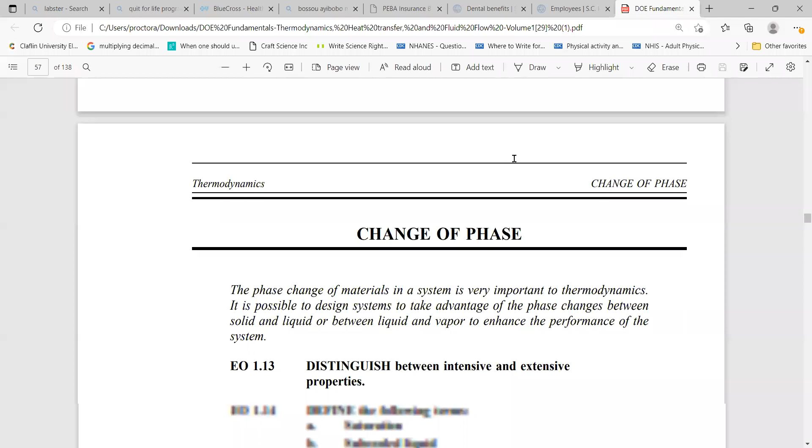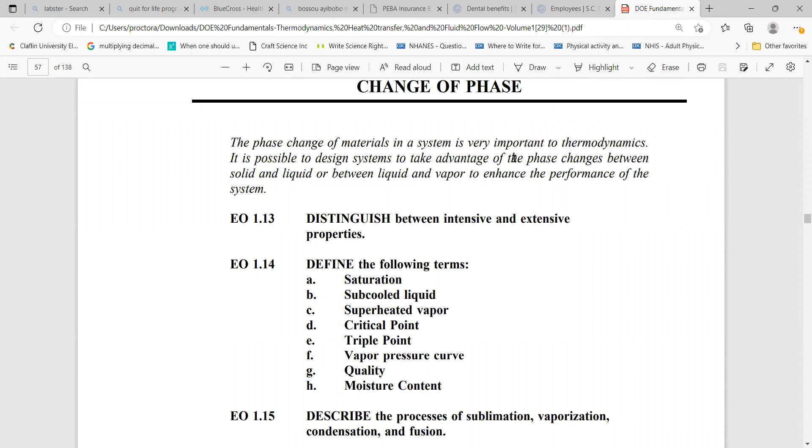Now we're going to talk about change of phase. The phase change of a material in a system is important to the study of thermodynamics. It's essential to understand the difference between solid and liquid, or between liquid and vapor, and how this is used to enhance the performance of a system. So it's important to understand phase.

Now, there are certain gas laws where we think about phase, and there are certain properties of solutions where we like to think about phase. And so, like I said, knowledge comes from the top down, and sometimes the way that we've worked in thermodynamics to understand phase changes has impacted people's daily life.

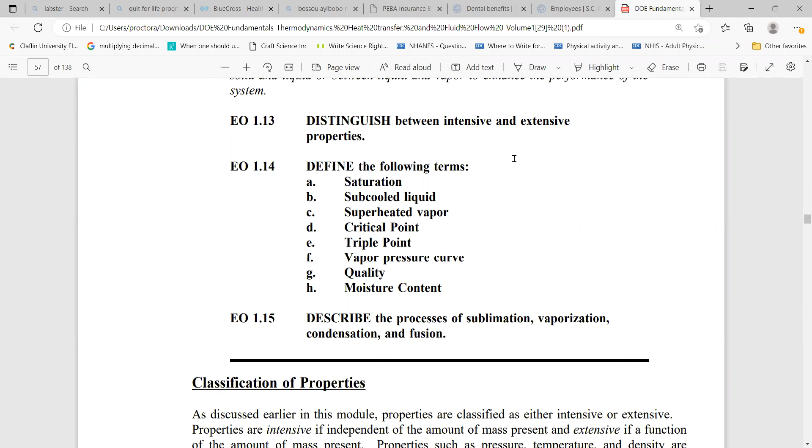So we're going to distinguish between intensive and extensive properties, and then we're going to talk about saturation, subcooled liquids, superheated vapor, critical points on a graph, triple points on a graph, the vapor pressure curve, quality, and moisture content. And then we're going to describe processes: sublimation, vaporization, condensation, and fusion.

These classification of properties, we talked about this earlier, and these properties are classified as either intensive or extensive. Remember intensive properties are independent of mass - temperature, pressure, density, specific volume. Extensive properties are directly related to the amount of mass present. So pressure and density are intensive, while volume and mass are extensive properties.

And these extensive properties may become intensive by dividing the property by the total mass. So they're trying to give you a way mathematically that you can look at this extensive property as an intensive property. Total volume, which is an extensive property, can be changed to a specific volume, which is an intensive property, by dividing it by the mass of the system.

So any specific property - specific volume, enthalpy, specific entropy - is an intensive property. So specific properties are intensive properties.

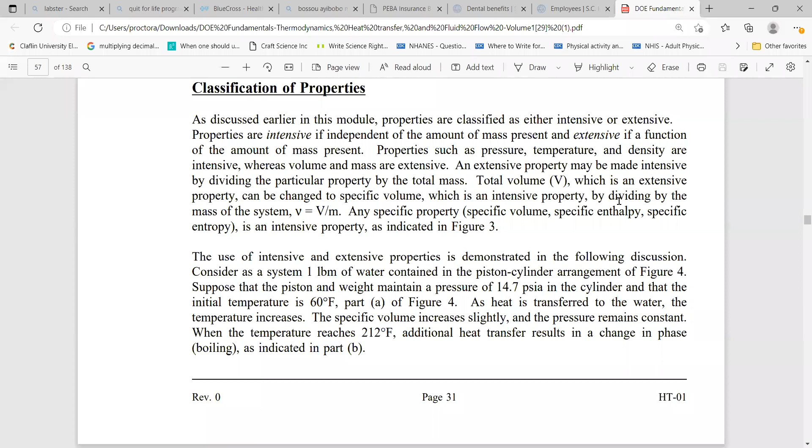The use of intensive and extensive is demonstrated by the following. So they want you to consider a system: 1 pound mass of water contained in a piston cylinder arrangement. This is in this figure. Let's see if I can - no, I can't capture it at the same time. The piston and weight maintain a pressure of 14.7 psi.

I like to use the piston sometimes to talk about Boyle's law, but also I like to use the piston to talk about the relationship between weight, mass, pressure, and volume. And what you see is that the initial temperature is 60. As the heat is transferred to the water, the temperature increases, the specific volume starts to increase, and the pressure remains constant.

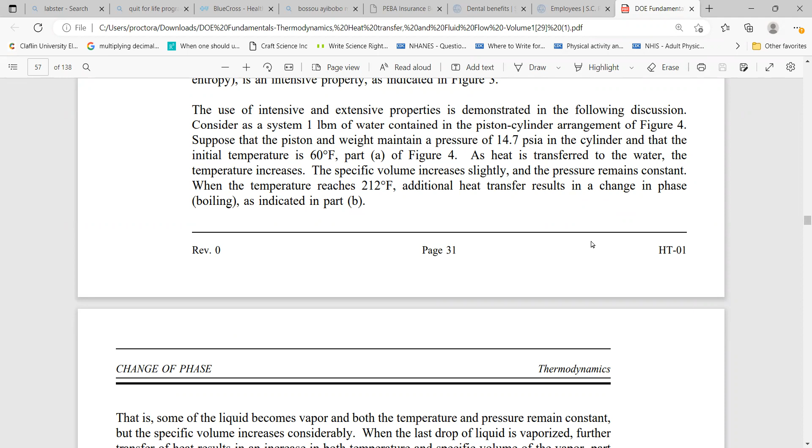When the temperature reaches 212, additional heat transfer results in a change of phase. So the liquid starts to boil, and when the liquid boils, you have a liquid and a gas phase. Some of the liquid becomes vapor, and both the temperature and the pressure remain constant, because we're inside of this piston.

The way we used to represent pistons was to use a syringe. That's the way we like to think about a piston. So if you want to think about a piston that way, you can understand how temperature and pressure can remain constant.

But the specific volume increases considerably. And when the last drop of liquid is vaporized, further transfer of heat results in an increase in both temperature and specific volume.

So in the example mentioned, talking about the piston, temperature and pressure are intensive, and they do not depend on the amount of mass present. By examining the specific volume, an intensive property of water in the piston, instead of the volume, which is the extensive property, we can talk about how the water inside of a piston changes.

So volume by itself tells us nothing about the water in the piston. However, knowing the specific volume can tell you if the water is a liquid or if it's steam. Why? Because if you put a liquid inside of a cylinder, you can tell what the volume is.

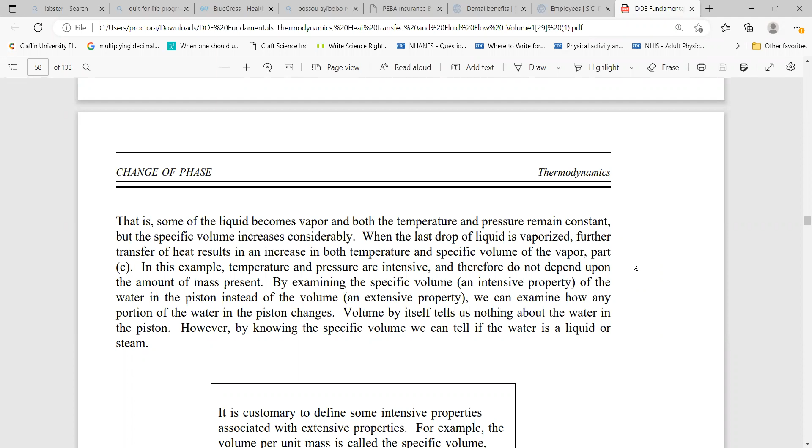So it's customary to define some intensive properties associated with extensive properties. Volume per unit mass is called specific volume, where lowercase v equals V over m. And internal energy per unit mass is called specific internal energy, so lowercase u equals U over m.

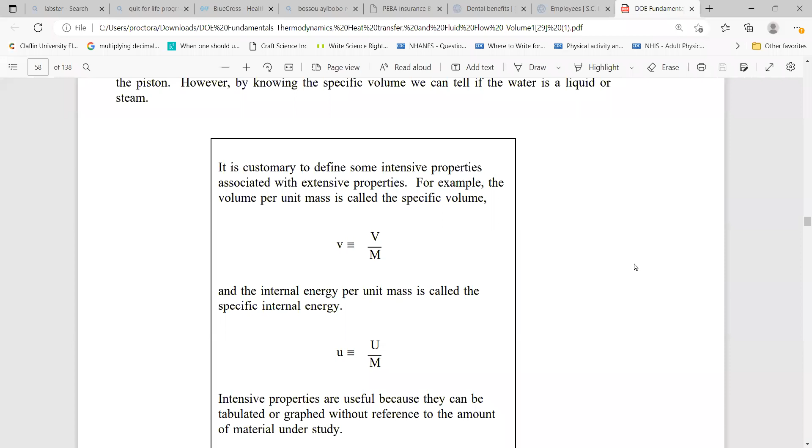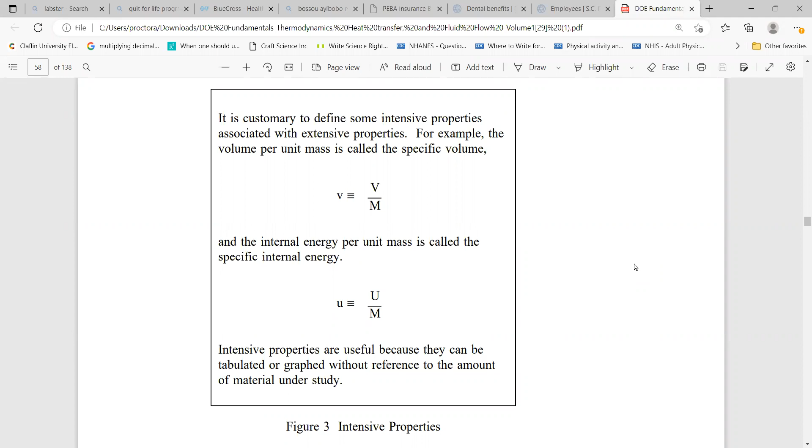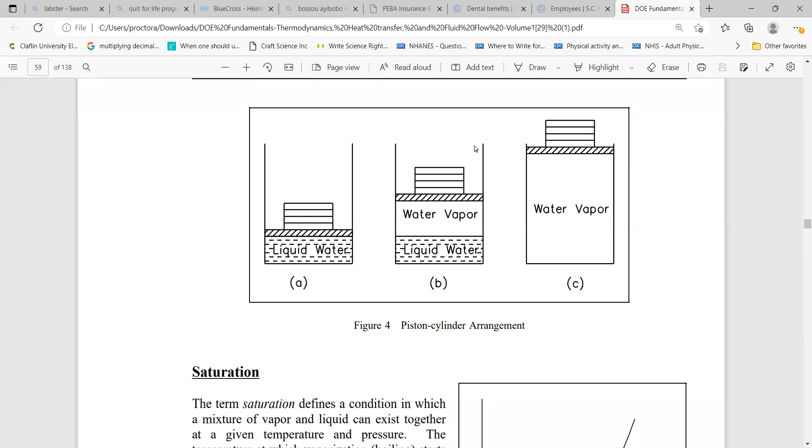We covered this part about the piston. Here you're looking at water, and in figure A, this is before you transfer the heat. You've compressed this liquid water, and you haven't put the heat there yet. Then once you transfer the heat and the water starts to boil, the gas exerts pressure and pushes this piston up. All of this water is converted to water vapor, and the piston is pushed up even further. That's the example they were giving you earlier.

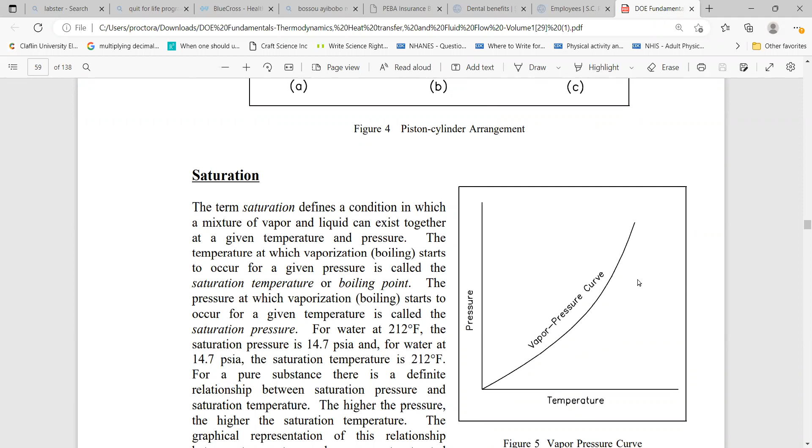So the term saturation, defined. This is a pressure-temperature graph here that you see.

The term saturation defines a condition in which the mixture of vapor and liquid can exist together at a given temperature and pressure. The temperature at which vaporization or boiling starts to occur for a given pressure is called the saturation temperature or the boiling point. They're using these two terms interchangeably. The pressure at which vaporization or boiling starts to occur at a given temperature is called the saturation pressure.

For water at 212 Fahrenheit, the saturation pressure is 14.7 psi. For water at 14.7 psi, the saturation temperature is 212 Fahrenheit. So for a pure substance, there is a definite relationship between saturation pressure and saturation temperature. If the substance isn't pure, there are other molecular interactions you have to account for, but we're talking about a pure substance here. The higher the pressure, the higher the temperature.

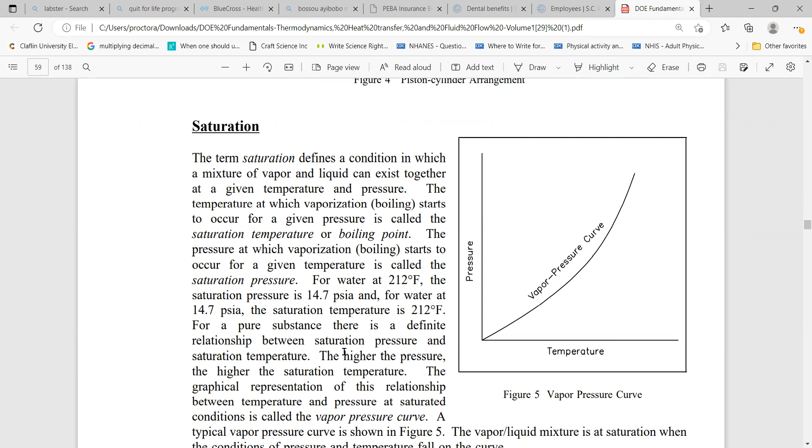So a typical vapor pressure curve is shown here, and like I said, this represents a positive slope. As X is increasing, Y is increasing—as pressure is increasing, temperature is increasing, and vice versa. The vapor-liquid mixture is at saturation when the conditions of pressure and temperature fall on this curve. When those points fall on this line, as pressure increases and temperature increases together, you have a mixture that is saturated.

So saturated and subcooled liquids - they're thinking about solutions again, or substances. If a substance exists as a liquid at the saturation temperature and pressure, it's called a saturated liquid.

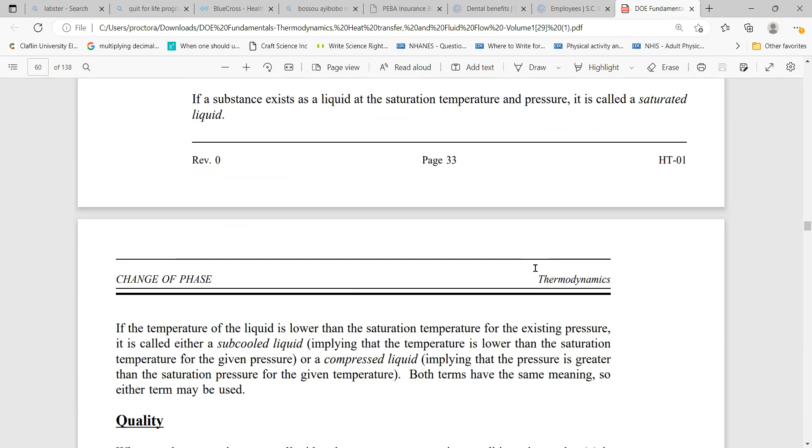Water is just water, and it's 100% water.

If the temperature of the liquid is lower than the saturation temperature for an existing pressure, it's called a subcooled liquid, implying that the temperature is lower than that at the saturated temperature for this given pressure. So it's subcooled.

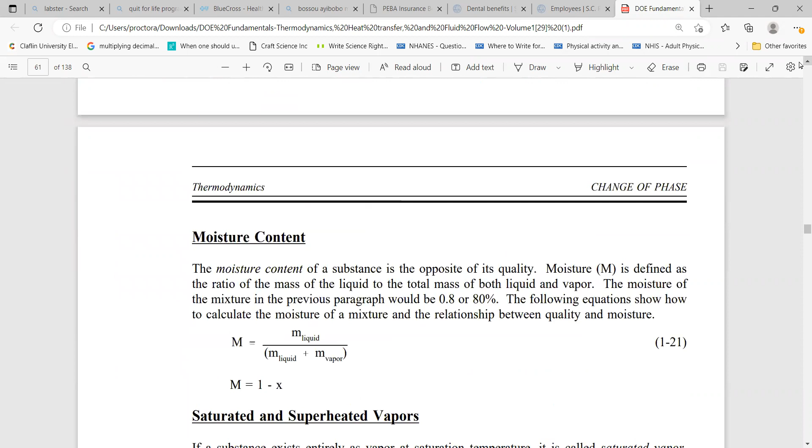This is something I don't know if you guys have seen before, because sometimes on YouTube they have these cool videos where they subcool some water and then pour it out and let it turn into ice. First they'll subcool it and it's still kind of liquidy, and then they'll pour it out and it'll just turn into an ice structure.

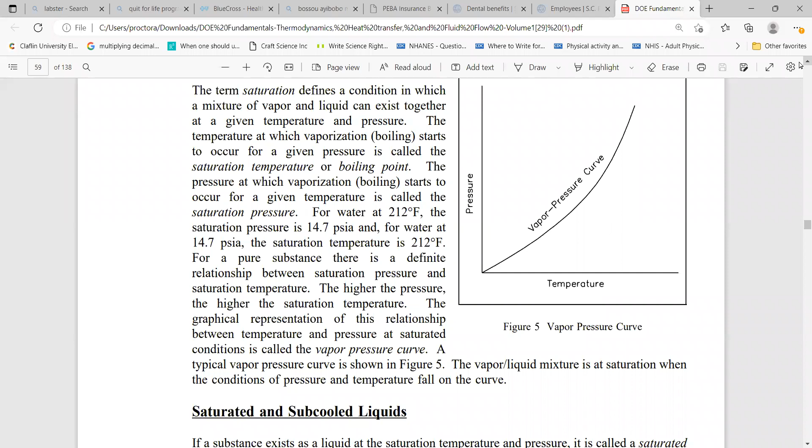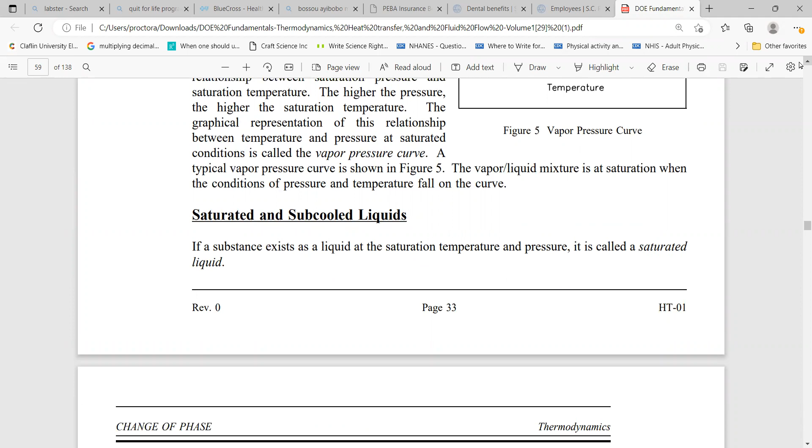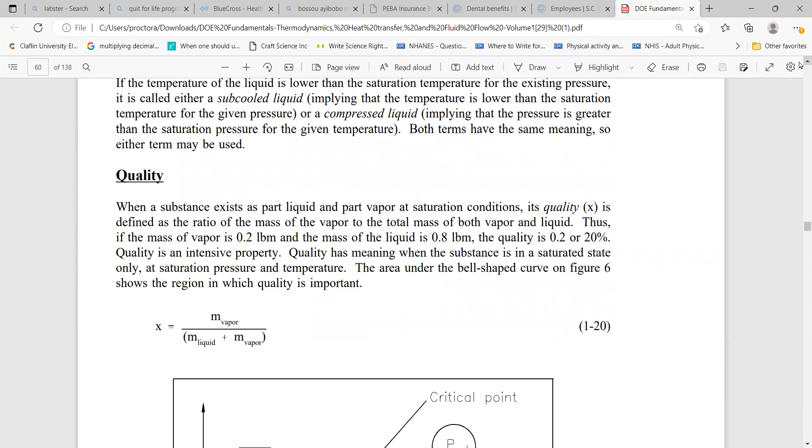So that's like, okay, I've got this below the freezing point. Then when I pour it out, I know that this water is below the freezing point because it turns into ice. So if a substance exists as a liquid at the saturation temperature and pressure, it's a saturated liquid. If you cool it past the freezing point, then you have a subcooled liquid.

A compressed liquid implies that the pressure is greater than the saturation pressure at a given temperature. The best example I could give is soda - that's the only thing I can think about, something compressed that has that sort of pressure to it.

That's not the example they're thinking about here, but if I think about pushing CO2 inside of a liquid, the best thing I can think about is soda. That's something you have to apply pressure to, to push that gas into the liquid. So applying this sort of pressure gives you a type of compressed liquid.

So both terms have the same meaning - either term can be used, and that's kind of like the way I like to think about it.

So they're saying a subcooled liquid is a compressed liquid, because you're taking these water molecules, if you subcool it, and you're forcing them to be close together. And when you've seen people pour it out, it turns into this ice structure, because the water molecules are close enough that they give you that crystalline structure you get with ice. That's the only way I can think about that example - the pressure pushes these molecules in so that they order and arrange themselves, just like what happens in an ice cube.

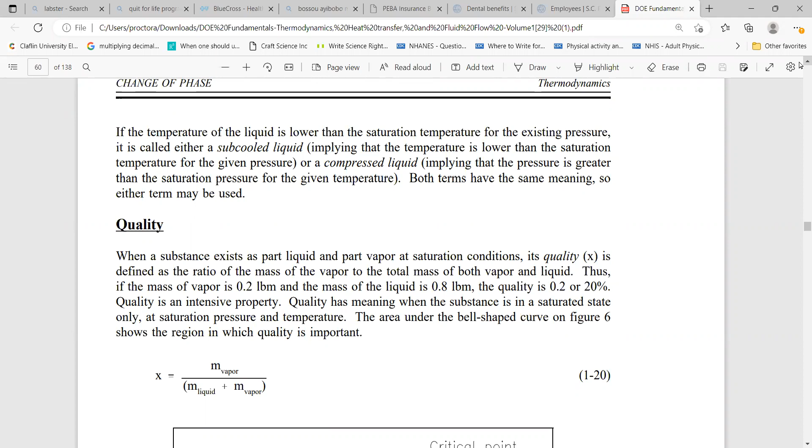And quality is an intensive property - you need to understand that quality is an intensive property. So the area under a bell-shaped curve on figure 6 shows the region in which quality is important.

Just in general, when we think about area under the curve, for me it helps when I'm doing any sort of spectroscopy - I think about area under the curve. I know the area under the curve is normally volume, but area under the curve helps me figure out concentration too. When I can't figure it out any other way, I know I can go to area under the curve and figure out concentration. So area under the curve is normally volume, especially if you're talking about Boyle's law.

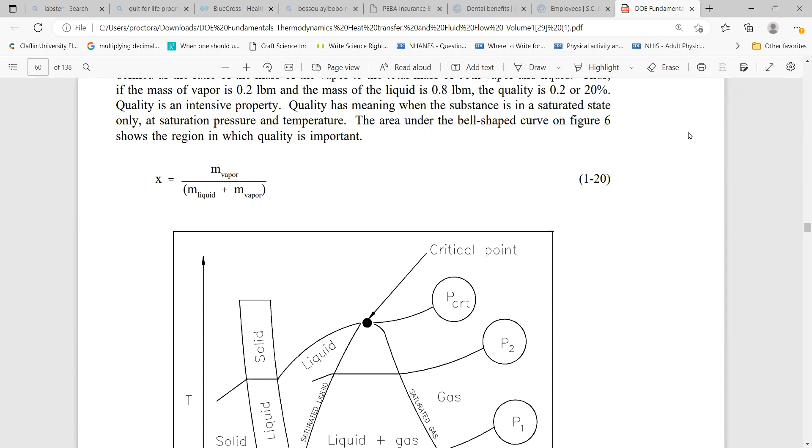Okay, so let's go back to this equation. The area under a bell-shaped curve in figure 6 shows the region in which quality is important. Quality, remember we said that was X, and X is equal to the mass of vapor over the mass of the liquid plus the mass of vapor. So the area under this curve - this is the bell-shaped curve - this area is where quality is important.

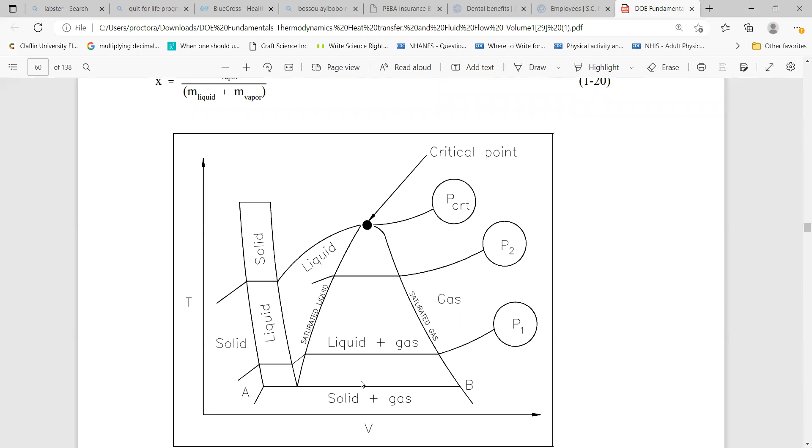Okay, so I'll finish up this, and then we'll finish our notes. The moisture content of a substance is the opposite of its quality. Moisture is defined as the ratio of mass of a liquid to the total mass of both the liquid and the vapor. That's what you see in this equation: moisture is equal to M of liquid over M of liquid plus M of vapor.

So the moisture of a mixture in the previous paragraph is either 0.8 or 80%. This equation shows you the relationship between quality and moisture: moisture is equal to 1 minus X. They're using X to talk about quality, so try to keep those straight, because earlier they showed you Z for height, H for height. Here we have X—a lot of people use X as default, but in this case they're trying to show the relationship between moisture and quality. So try to keep that straight.

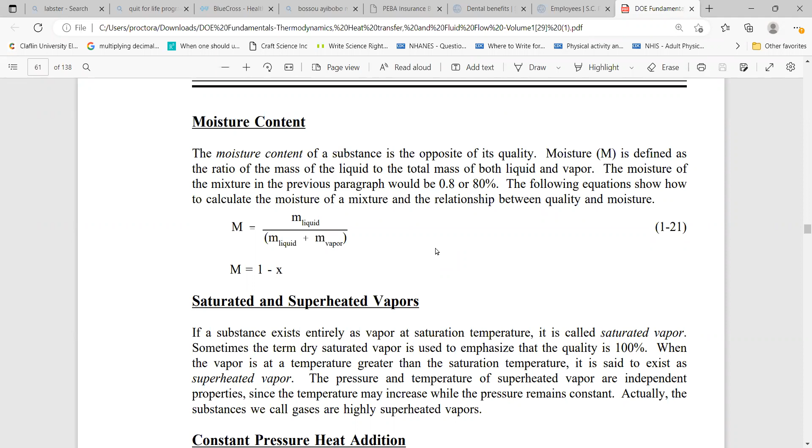If a substance is entirely vapor at saturation temperature, it's called saturated vapor. So we're talking about saturated and superheated vapors. Sometimes the term dry saturated vapor is used to emphasize that the quality is 100%. When a vapor is at a temperature greater than the saturation temperature, it's said to exist as a superheated vapor.

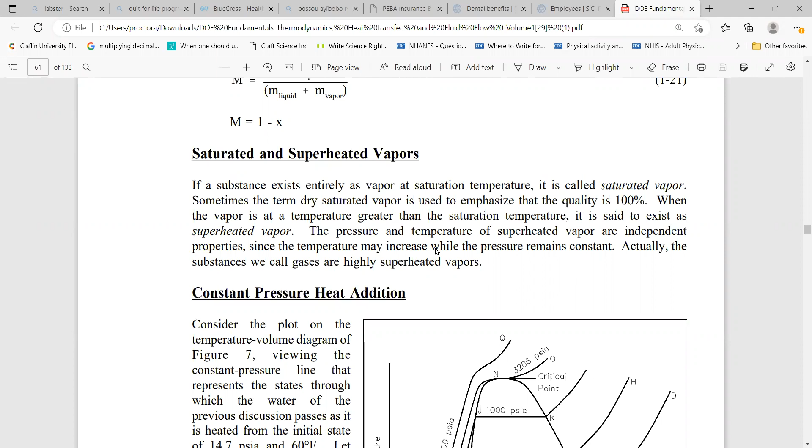The pressure and temperature of a superheated vapor are independent properties, since the temperature may increase while the pressure remains constant. And they're making the argument in your book that gases are superheated vapors.

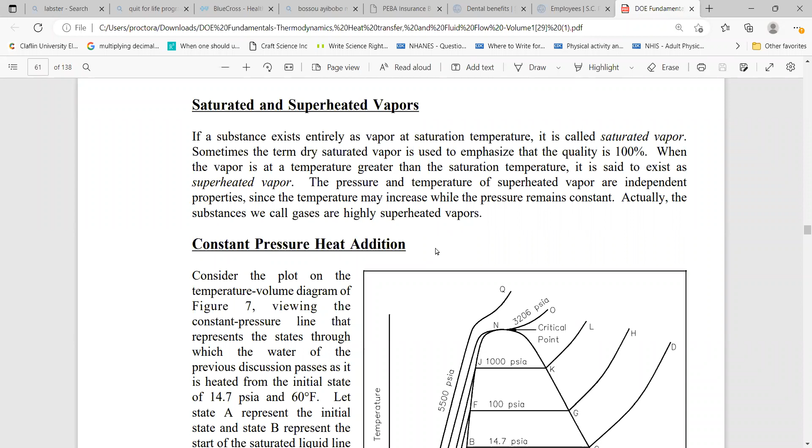So here you're looking at a temperature-volume diagram. On your y-axis, there's temperature; on your x-axis, volume. As you go up, temperature increases; as you go from left to right, volume increases. This is figure 7.

They're looking at the constant pressure line that represents the states through which water passes as it's heated from an initial state at 14.7 psi at 60 degrees Fahrenheit. This is the temperature that engineers use when they start talking about STP—that's not the way a chemist thinks about STP. For us it's 25 degrees centigrade, 1 atmosphere; for this, they're using 14.7 psi and 60 degrees Fahrenheit.

So state A represents the initial state, and state B represents the start of the saturated line. So where is state A? Going down at the bottom, where it says the initial point.

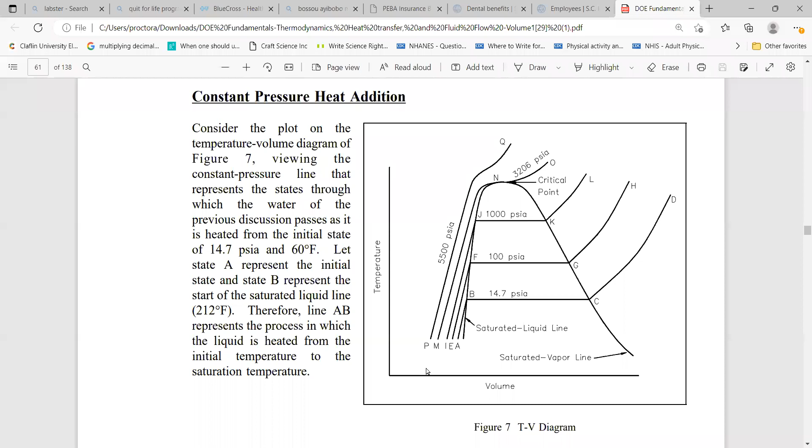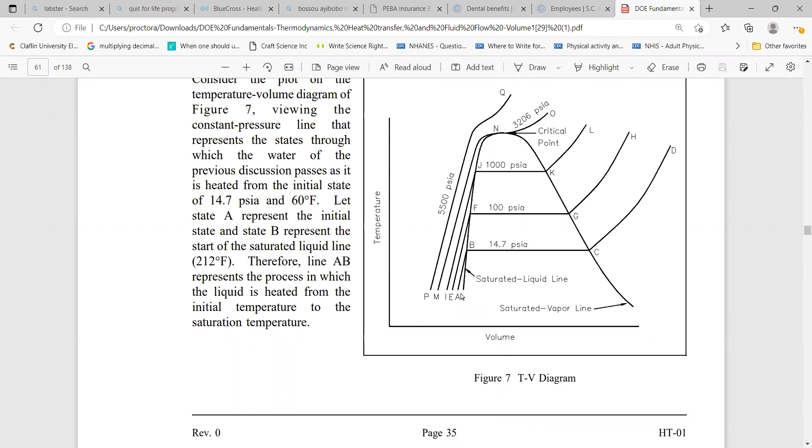So therefore line AB represents the process in which a liquid is heated from initial temperature to saturation temperature. I'm trying to get used to how engineers think about this. So where is A at? At the very bottom.

So in this part right here, they're saying that the temperature is going up—temperature is actually increasing. Here, the temperature remains the same. Remember, I was telling you guys about latent heat earlier, the phase change. Theirs just looks a little different from mine because they have all these different pressures shown. So their standard pressure—for example, if you have a liquid going to a vapor, at first you have to heat the water, then it changes from liquid to gas, and then you can heat the gas. That's what they're trying to show you.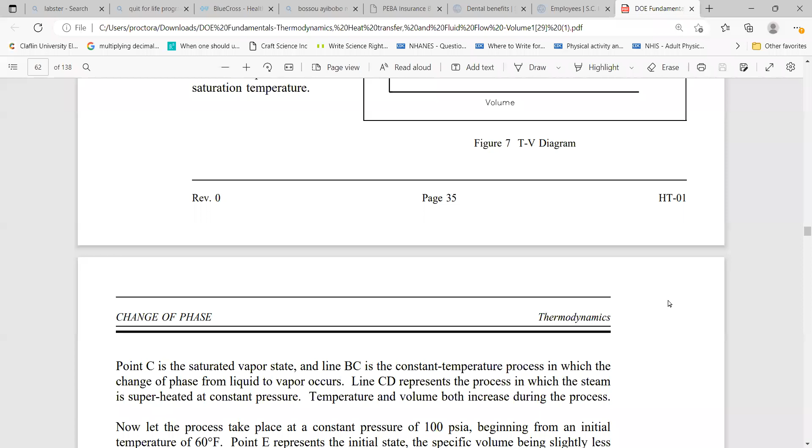So their diagram looks very different from what you would see in a typical chemistry textbook.

Now we're looking at a process that takes place at a pressure of 100 psi. So go back to this, they're going back to this line here - they're going from here up and then over. That's the way you need to think of those, because that's not how a chemist typically thinks about those stair steps that talk about latent heat changing in phase, and then that Q equals MC delta T. We just plotted it quite differently.

So point E represents the initial state, the specific volume being slightly less than 14.7 psi at 60 degrees Fahrenheit. Vaporization begins at point F, where the temperature is 327.8 Fahrenheit, and point G is the saturated state, and line GH is the constant pressure process in which the steam is superheated. So like I said, the way that they do their graphs is quite different than the way that a chemist would do this graph.

So this is definitely the engineer way of looking at the same concept.

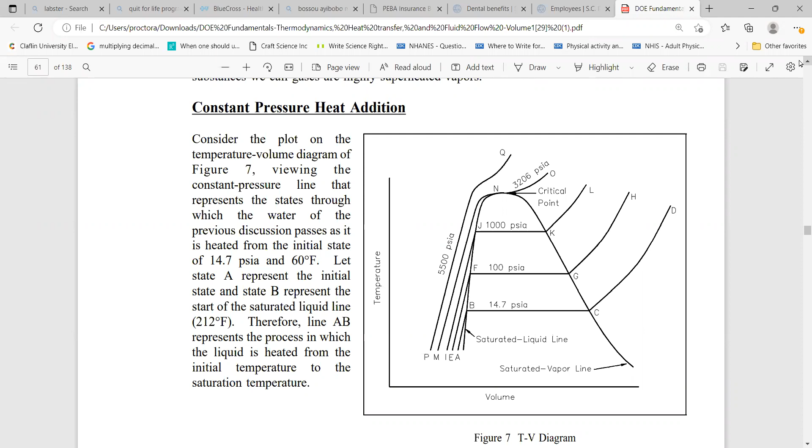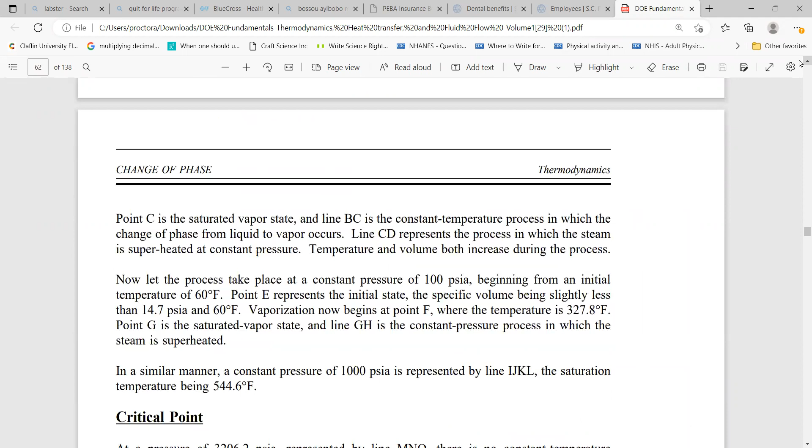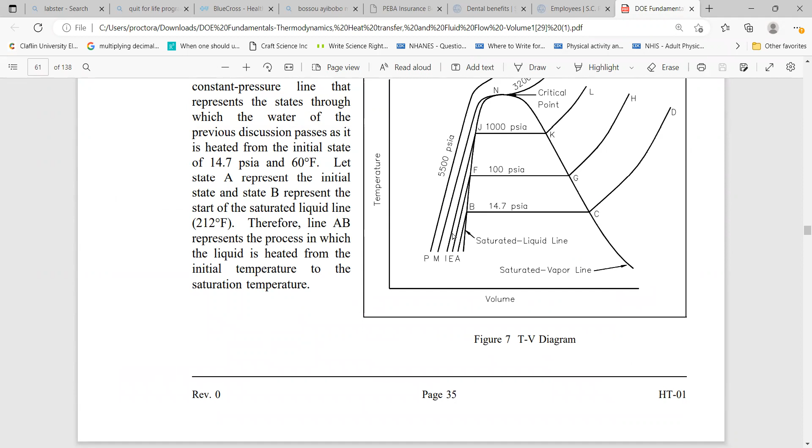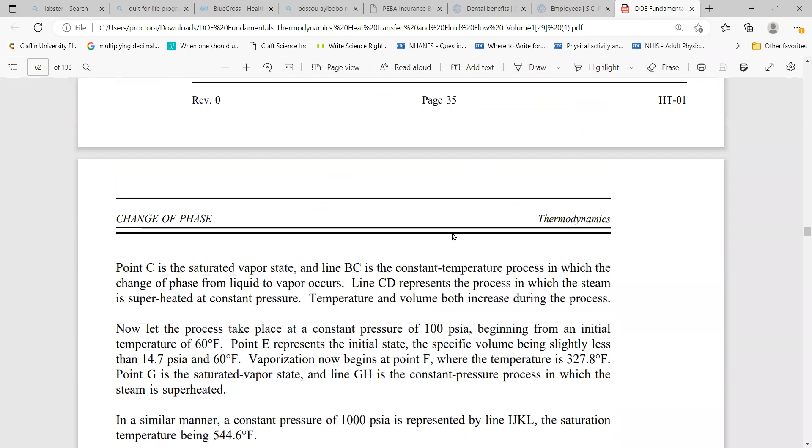So in a similar manner, constant pressure of 1,000 psi, and they're going right here - this line and then over. This is represented by line IJKL, and the saturated temperature is 544.6 - so you would actually go over this way, and they're telling you what these values are. It's not like you can look on the graph and extrapolate and see 544.6 degrees Fahrenheit.

So the critical point is at the pressure of 3206.2 psi. Some of these values you need to know - you need to know the pressure for your critical point, stuff like that. So if you see values written throughout here, you need to know them. It's not like they won't put them in the problems when they work them, but just keep this under your hat so that if you see it again in a problem, you understand where this comes from.

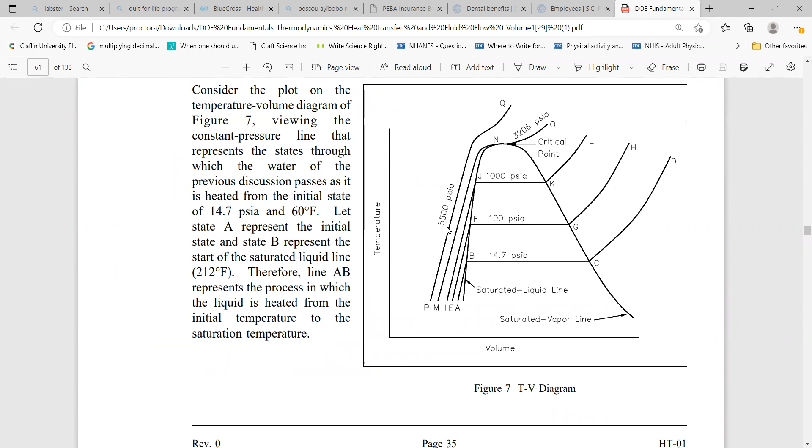So at a pressure of 3206 psi, this is it - you see this line right here? It goes up, then over like this. This is represented by line MNO. There is no constant temperature vaporization process; rather, at point N, there's a point of inflection.

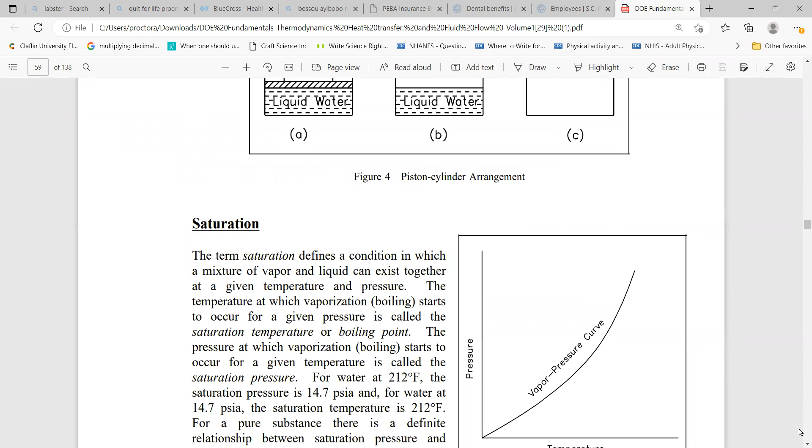And so for us, when we think about derivatives and calculus, then we start talking about points of inflection, but it's really like where the graph curves in a different way. So let's say the graph - yeah, so in calculus we start talking about derivatives, and then we start talking about points of inflection.

And so if you look at this graph, it's curving this way, then when it gets right here, it starts to curve up this way. So what's going on in here is a point of inflection - this is the point in which the graph curves up this way. First it's curving like this, and then it flips and goes this way. So that point right in here is the point of inflection. This is the point where the graph changes direction, and this is just a concept we talk about in calculus.

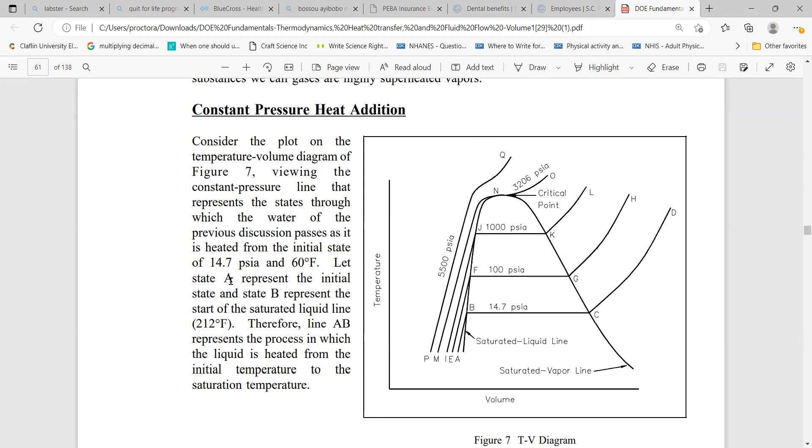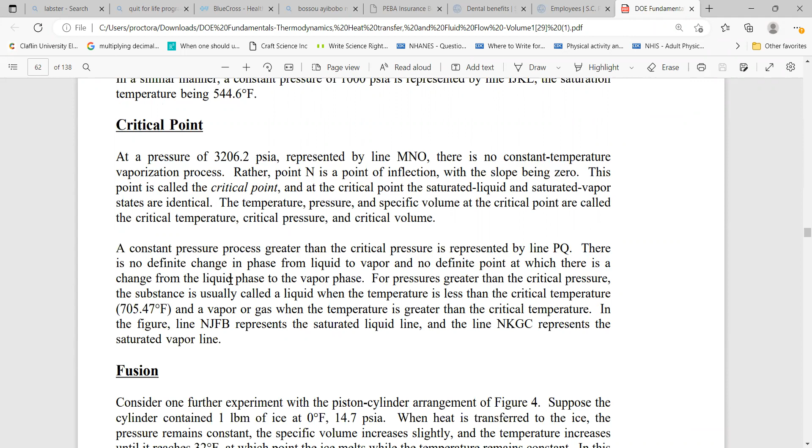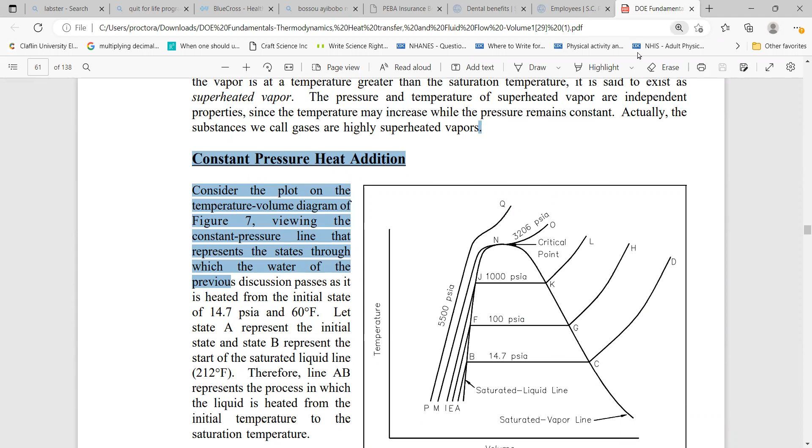So all you need to know is just a point in which the graph changes direction. If this graph wouldn't have changed direction, you would have seen it curve down this way or something - if it was going to keep doing what it did, it might go straight or curve down this way. It's not going to go up like this. That's a point of inflection.

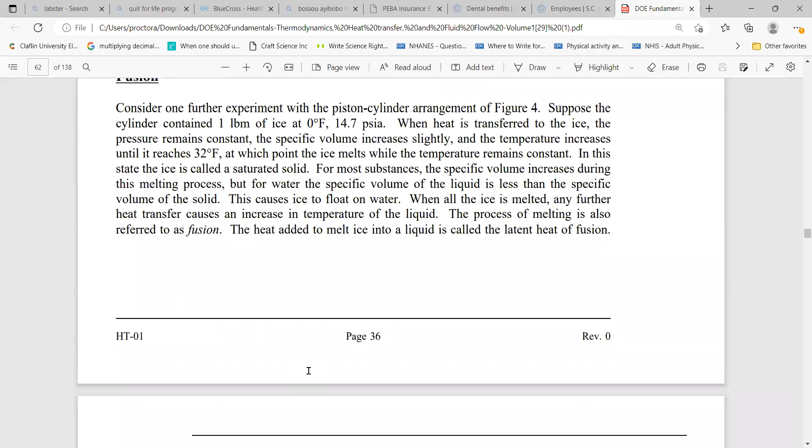Missing something. Yeah.

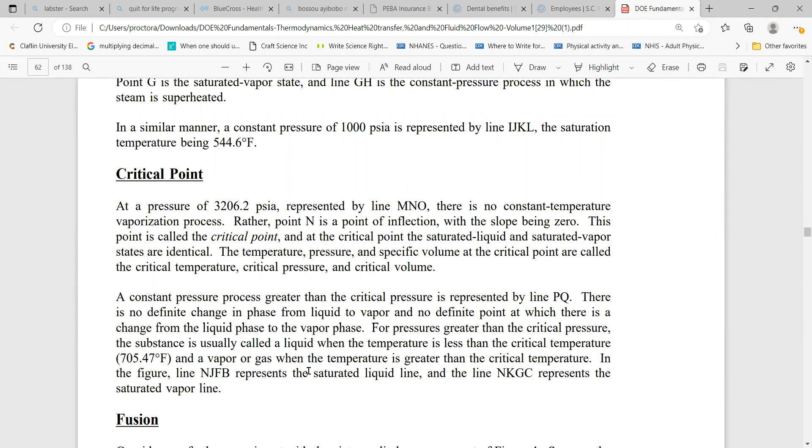Point of inflection. At that point, the slope is 0. So at that point right here where the graph changes direction, the slope is 0. Where my hand is touching my arm, where the graph starts to change direction, that slope is 0, and this is called the critical point.

Normally in industry, we used to subtract every step from the step before it to see where we had the biggest value change, and we would know that is the point of inflection. So if I would do a certain titration, like a potentiometric titration, which kind of looks like a pH meter, I would look at the point where I have the biggest change in the line, and that's how I know what the point of inflection is.

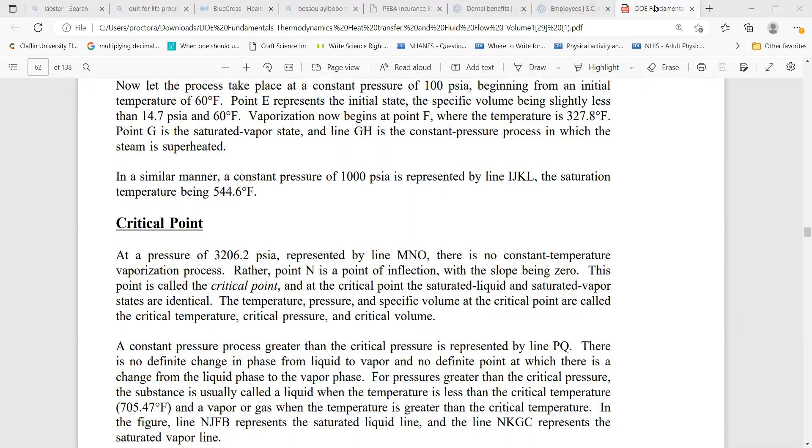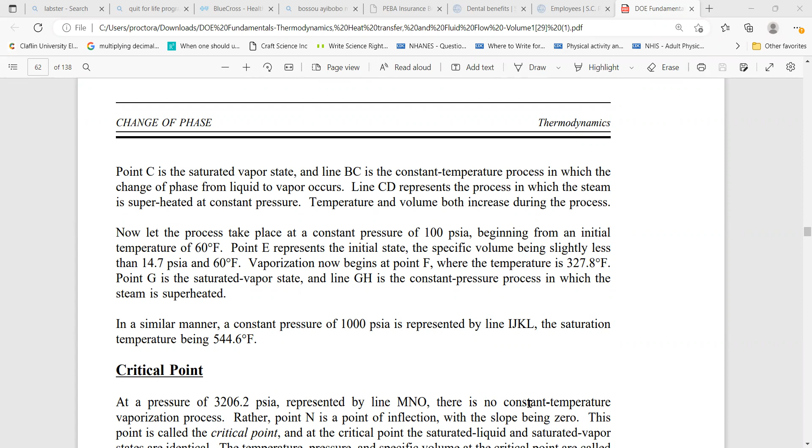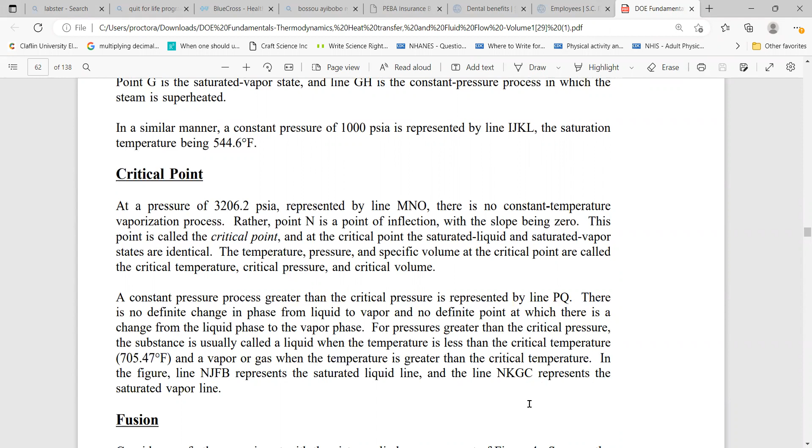That's called the critical point. This critical point is this point where you have this inflection. A point of inflection, the way we like to think about it in calculus, is the point in which the graph changes direction, and at that point where the graph changes direction, the slope is 0.

Fusion: if we think about that piston cylinder from the earlier example, suppose it had 1 pound mass of ice at 0 degrees Fahrenheit and 14.7 psia. When heat is transferred to the ice, the pressure remains constant, the specific volume increases, and the temperature increases until it reaches 32 Fahrenheit. That's the melting point for the ice.

So in this state, ice is what you're calling a saturated solid. It's all H2O, a saturated solid.

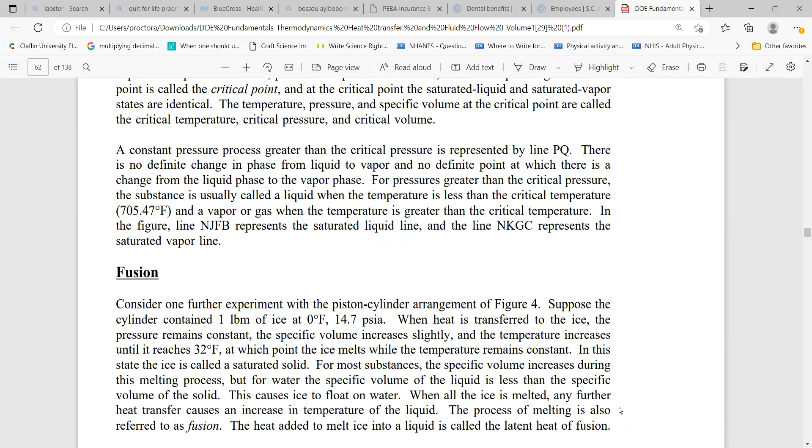The heat that's added to change that phase from solid to liquid, or from ice to liquid, is called the latent heat of fusion. This is the point where the temperature is not changing because the phase is changing.

Sublimation: if you have initial ice at 0 degrees Fahrenheit and 0.0505 psi, heat transfer to the ice results in an increase in temperature to 20 degrees Fahrenheit. At this point, however, the ice passes directly from the solid phase to the vapor phase, and this is called sublimation.

The way you can visualize sublimation is like dry ice - it doesn't have a liquid phase, it goes straight from the cubes to this white looking smoke. That's another way to think about sublimation. Sublimation is a specific term used for cases in which the transition from the solid phase to the vapor phase occurs directly without passing through a liquid phase. So again, with dry ice, you start with the cubes, and then you get the white smoke.

Further heat transfer will result in superheating the vapor. So if you keep putting heat to that dry ice, you're just going to get more smoke, or let's just say you get warmer smoke.

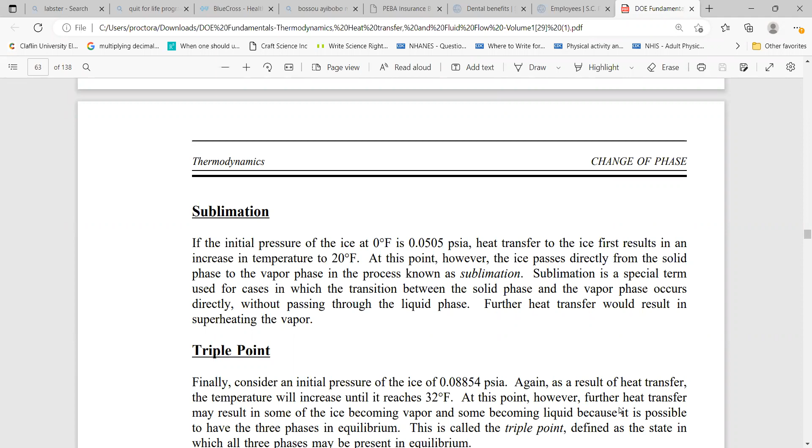Triple point: we're looking at the initial pressure of ice as 0.08854 psi, and again this is a result of heat transfer. The temperature increases to 32 degrees Fahrenheit. At this point, further heat transfer may result in some of the ice becoming vapor and some becoming liquid. So it's a triple point because all the phases are there and they may be at equilibrium. That's why it's called a triple point.

So it's not a critical point like that inflection point. This is that one point where all the phases are right there in equilibrium. So you can see the vapor, you can see the liquid, you can see the solid.

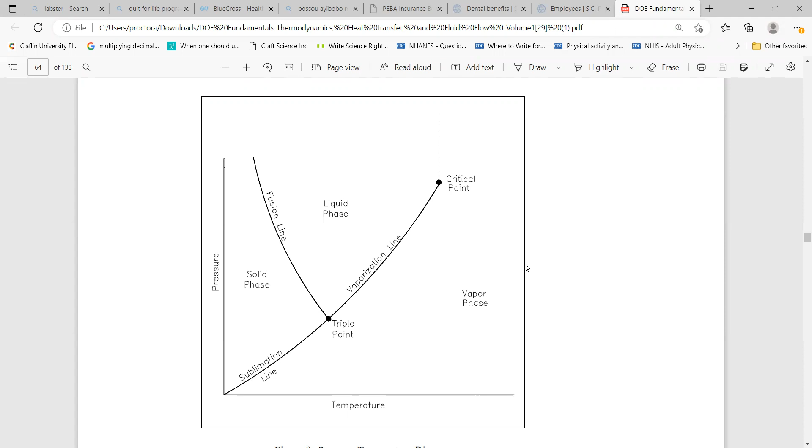Let's see how they describe it. So finally, you have to consider the initial pressure of 0.08854 psi. Again, as a result of heat transfer, the temperature will increase until it reaches 32 degrees Fahrenheit. At that point, further heat transfer could result in ice becoming a vapor and some becoming liquid, because it is possible to have all three phases in equilibrium, and that's called the triple point.

So in figure 8, this is a pressure temperature diagram for water, and it shows how the solid, liquid, and vapor phases can exist and be in equilibrium with each other. And then, of course, I showed you the sublimation line, the fusion line, and the vaporization line, and the phases that are along that line.

So the only point at which all three phases exist in equilibrium is the triple point, and the temperature and pressure for the triple point of water are 32.02 degrees Fahrenheit and 0.08865 psi. If you use those points, you can find the triple point. The vaporization line ends at the critical point, for this water graph in the aforementioned figure. That's why they're showing you there's a difference between a triple point and a critical point.

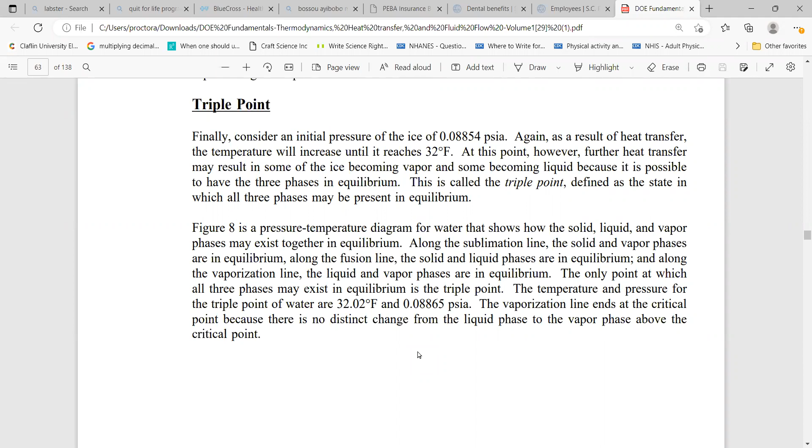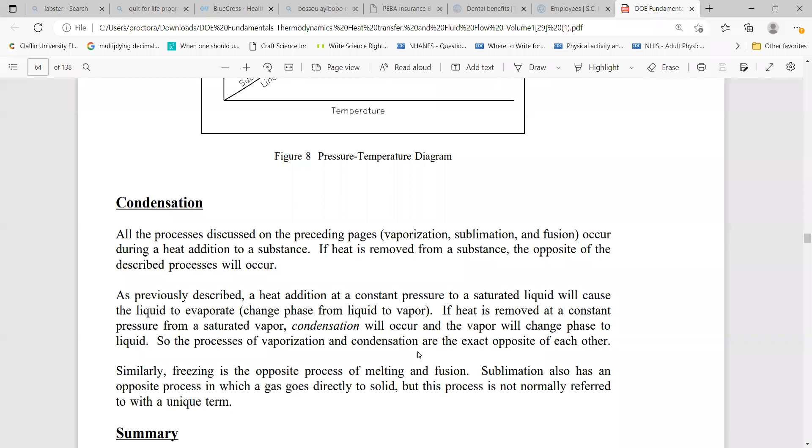Okay, and so we already covered this graph. Condensation is where heat is removed and the opposite processes occur. So instead of making a gas, you're cooling or removing heat and you're making a liquid. We call it condensation, the reverse of the processes on this graph.

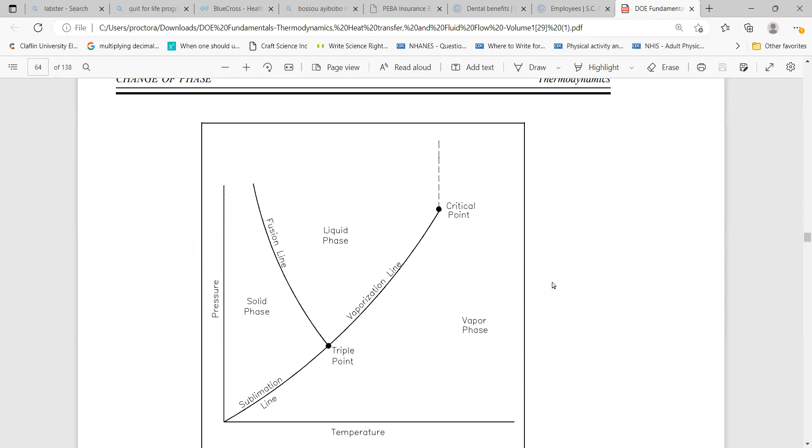Here's your vaporization line. Normally you'll go from liquid to vapor if you're adding heat. If you're losing heat in the vapor phase, you go from vapor to liquid, and that process is called condensation. As previously described, heat addition at constant pressure to a saturated liquid will cause the liquid to evaporate, changing from liquid to vapor. If heat is removed at constant pressure from a saturated vapor, condensation occurs. Similarly, freezing is the opposite of melting and fusion.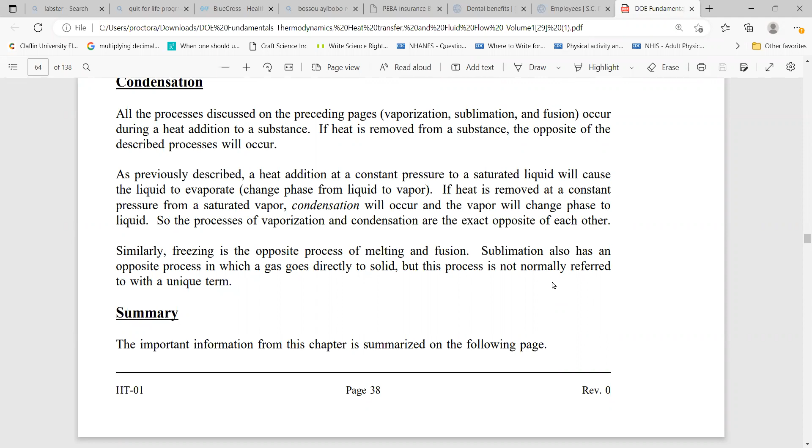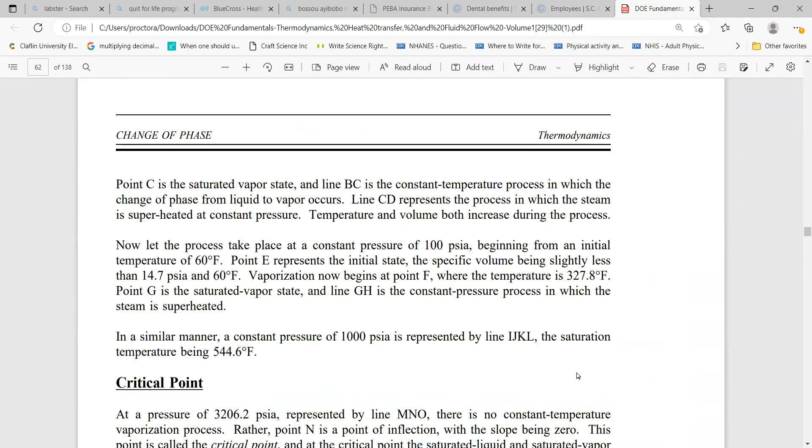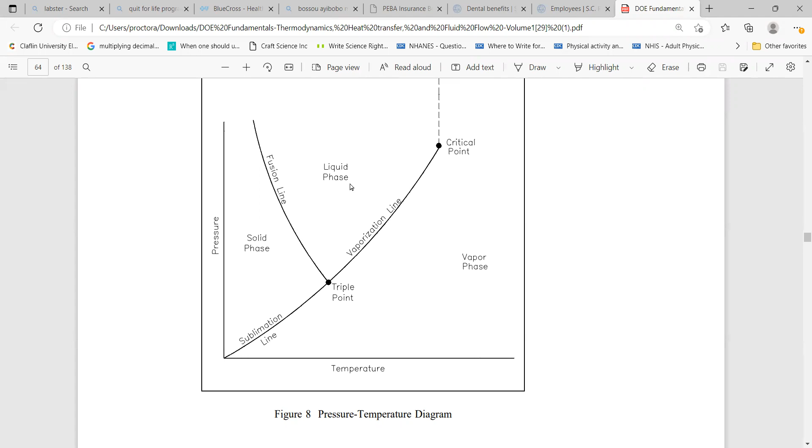Pictures. So this fusion line, if you go from solid to liquid, this is fusion, but going from liquid to solid is freezing. So freezing is the opposite of melting and fusion, and sublimation also has an opposite process where gas goes directly to solid. That process is not normally referred to with a unique term.

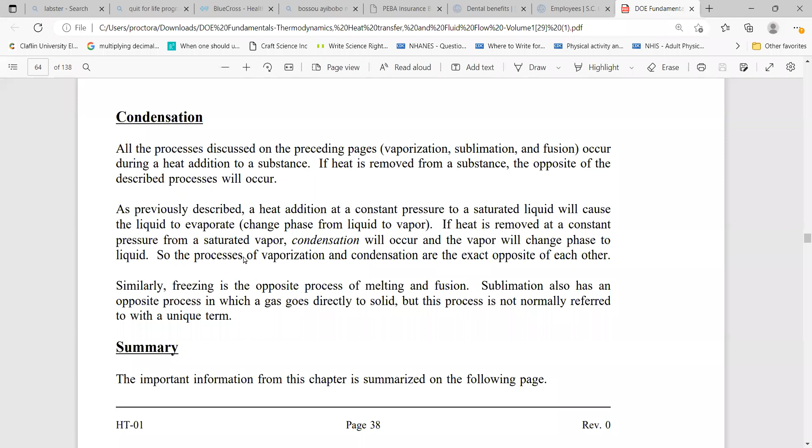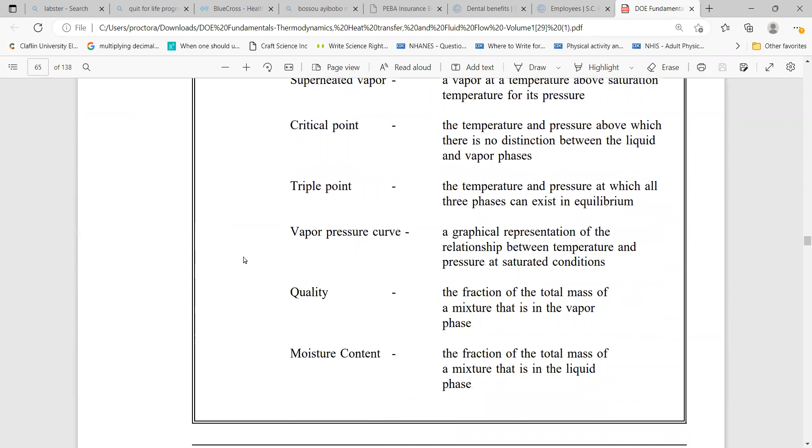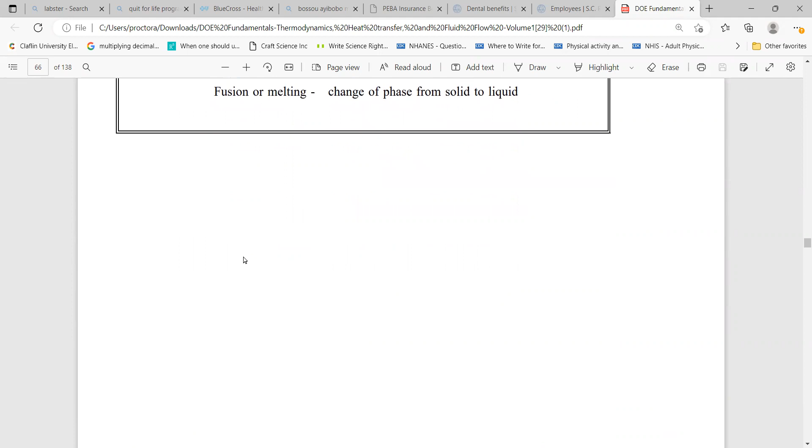And then, of course, you'll go through the summary, and any formulas that you need, you'll go use those formulas, you'll add them. Any constants that you saw, please make sure you notate those, because there's just a lot when it comes to how an engineer plots these same concepts.